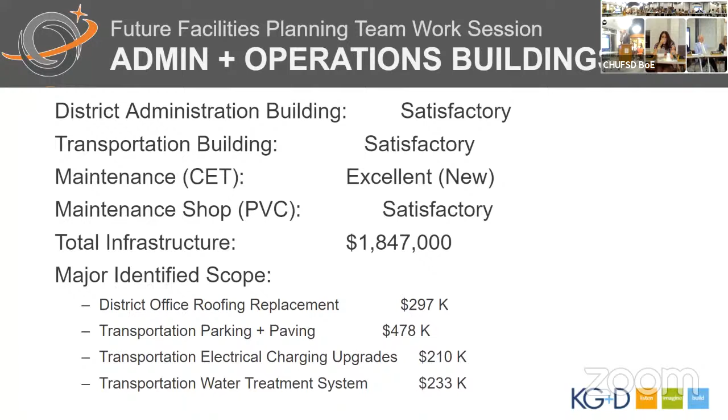So this is actually a very key slide - this is by priority. And what this is telling us is that the vast majority of the recommended work falls into that priority 3 category. Remember, priority 3 are items that are in good working order, but are at the end of their expected useful life.

This is indicative of very strong maintenance programs and a very sound capital plan. So we have very few items relative in this whole proposal of priority 1 items. That means that the buildings have been well cared for, your buildings are in good condition, and this is a prudent plan to avoid any emergency with your infrastructure. So that's a great slide.

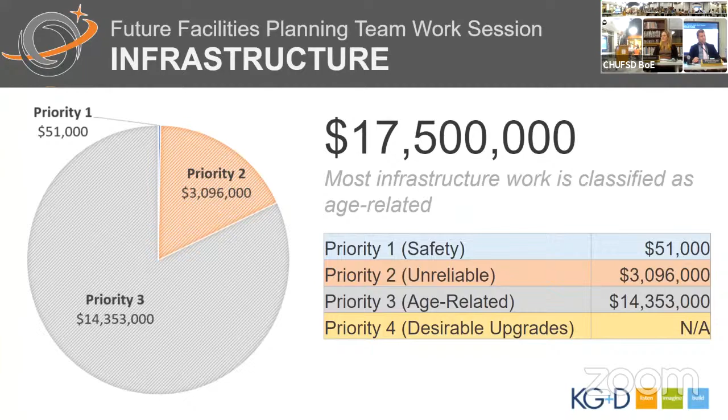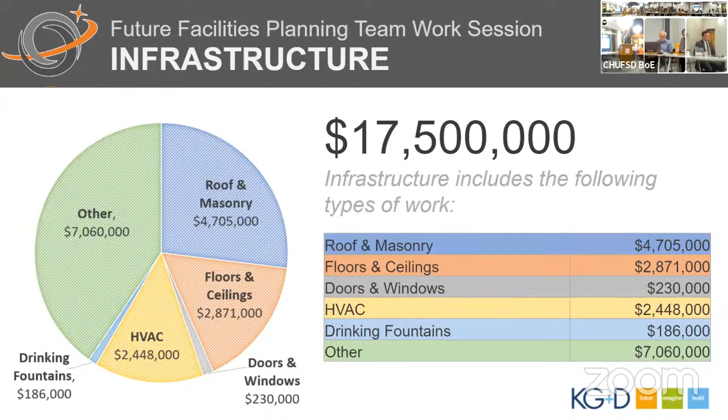And then this just captures the work by category. We talked repeatedly about roof and masonry, interior finishes. There is a little bit of doors and window work, a significant amount of HVAC improvements, drinking fountains and bottle filler stations throughout all the school buildings, and then a broad brush category of other, which captures about $7 million.

Other includes all those different systems that fall into the building condition survey form, and you can see there's quite a few of them at different locations, and most of them happen in all of the schools - things like fencing, exterior signage, casework, handrails, plumbing fixtures, locker repair, VCT, and then some things like fire service valves, etc. So there's quite a bit that falls into that other category.

Thank you, Walt. The future facilities team has been working diligently with KG+D, especially Walt and Sarah, to envision a project that would have the broadest impact on students, both now and into the future. The team has arrived at a proposed project that aspires to balance the infrastructure Walt was talking about with a needed look towards future student experiences. This team's dedication was so appreciated that we want to take a moment to acknowledge them. And I want to echo that, John.

Thank you to every single member of the team for the outstanding, dedicated, diligent work you've provided so far. We're not done yet, I'm actually just getting started in some ways, but I wanted to take this opportunity to recognize and thank every one of you for your contributions on behalf of all the students, the faculty, the staff, and really the entire community. Thank you for your leadership.

As we take a moment, I would ask that the team take a look at the scope of the potential effect here, which I think is really impressive to consider. Across all buildings, as well as Spencer Field, if you take a look at the concepts the team has wrestled with and come to consensus around, I think it's fair to say that if approved by the community, this has the potential to impact broad swaths of the experience for students across teaching and learning, the arts, athletics, as well as the safety and security our buildings have come to be known for and expect.

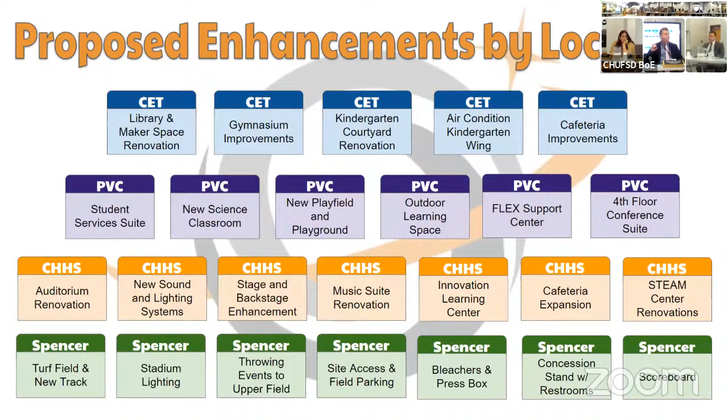We also want to make sure that as we did our work as a team leading up to tonight's presentation, as we looked at those four priority areas — teaching and learning, athletics, the arts, and infrastructure — we designed a project that felt balanced between each of those areas as well.

We designed this slide to represent that, perhaps in a different way for everyone graphically, beginning with the aspects of the project that relate to enhancing student athletes' experience, the experience of our athletics program, teaching and learning across our entire system, improving the experience of our students in the arts, and enhancing and supporting the infrastructure of our schools. I'll give everyone a moment to take a look at that — I find it impressive.

Thank you. As you heard a bit earlier this evening, CHHS will soon be celebrating 100 years, which is a reminder of how much history there is in this building, but also a real need for some updating. Considering that most of the building was originally designed to fit what education looked like in the 1920s, the proposed renovations we're going to talk about tonight focus on four key aspects of our school that will help set us up for what education needs to be now and in the future.

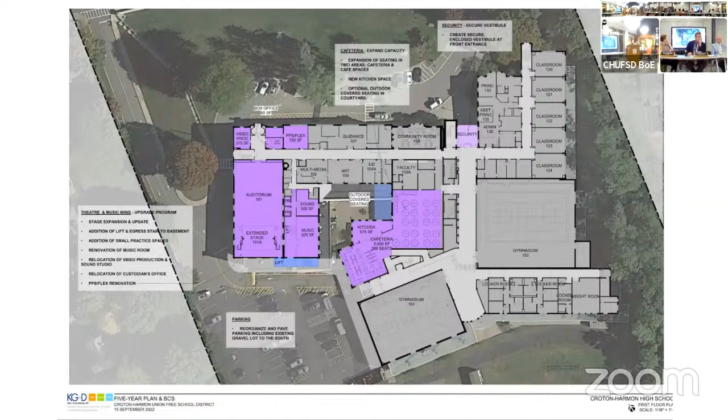So starting with the high school plan, what we've done is massaged things around a little bit. We've created a larger grouping of areas. You can see that the purple is actually the area that we are renovating, and anywhere in light blue will be the areas that would be an addition or something new for the building. So really what we've been trying to do is work as much as we can within the spaces that we have and just renovate within the interior.

You can see the auditorium itself is quite self-contained, but we're going to open it up to extend the stage, and try to make some more connection and also stair access for the basement and the upper levels that are connected to that.

And then for the cafeteria space, you can see that we're opening it up to have more of a kitchen space, which we don't have right now, with two distinct areas for eating, one more like a cafe and one cafeteria. And then also, as Molly had mentioned, the outdoor seating area.

You can see also up in the upper right, we are, of course, very concerned about security, and that has been built into the project too, to make sure that we have an enclosed vestibule as the entrance to the school.

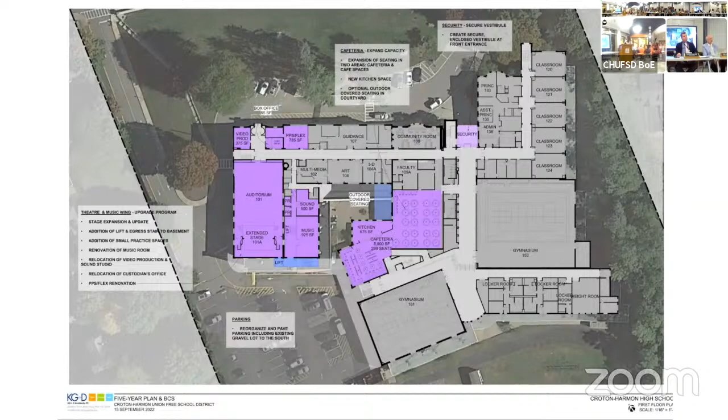So as they very eloquently expressed, this innovation learning center is really a great space. What we've done is identified together as a team one of these central spaces within the building that would be really well fit for this. Not only is it central, but it also is situated over where the older gym building was, so the structure is quite open and allows us to open that up.

Currently, there are about 6 classrooms in there, and like Dr. Laura said, they're small rooms and very close together, but being able to use this space and open it up will give us a great opportunity to do that.

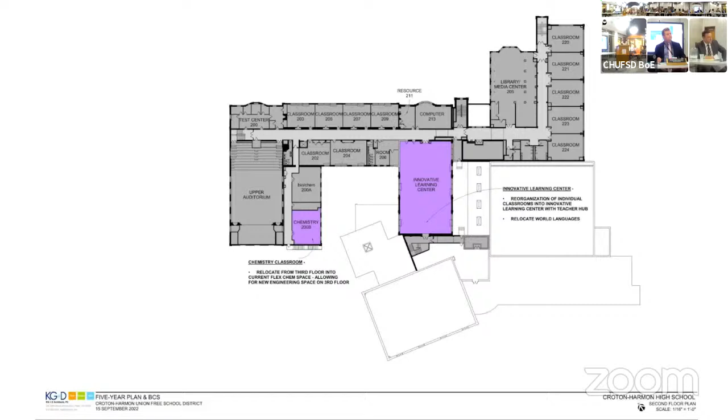And then on the top floor, you can see the highlighted areas are the rooms that we're planning to work with for the STEAM Center. Because we have an older building, we can't necessarily knock down walls here and there, but we're going to go in and do what we can to make those spaces much more dynamic and usable and helpful for the students.

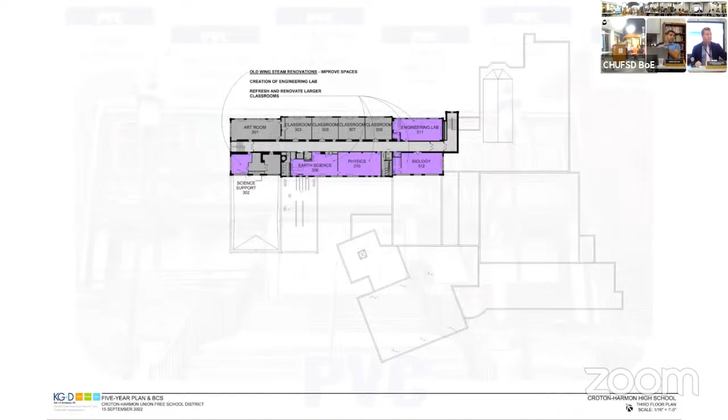Good evening. Thank you for having us. We're very excited to be part of this presentation, and more importantly, to be part of the future facilities planning team. First, I would love Sally to speak first this evening. Sally is one of the people who've been at PVC slightly longer than I have. I've seen lots of changes and been involved in those changes. She's also a resident and teaches two different languages. So I just said it has to be in English, but I know she prefers French.

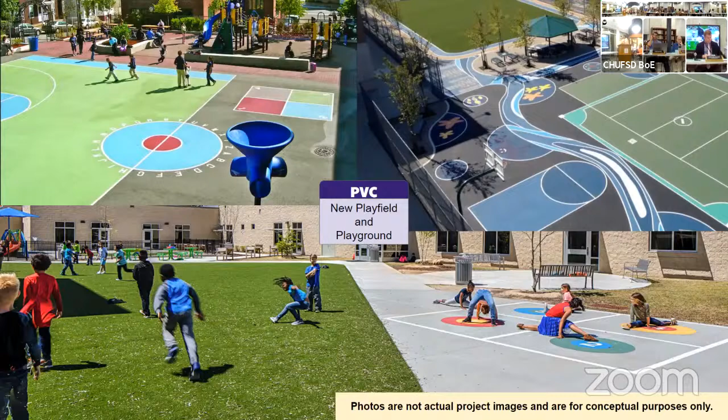The next one is the new student services suite and the Flex Support Center. I think this is really central. I'll tell you a story. We need to make this area for our students. As you know, we have 5th to 8th grade students, and we need to make it central and accessible and comfortable for our students.

So today, literally, I ran into a 5th grader who was waiting for one of our school psychologists outside their door. They were in a meeting, and the student looked very uncomfortable and didn't know what she was doing. This was on the third floor, and the door was locked. I said, 'Oh, can I help you?' She said, 'I'm waiting for Miss Elder.' So I said, 'Well, let's look around.' As I walked her past Miss Elder's office, I said, 'Here's Miss Bonilla's office, and here's Miss Beja's.' I literally walked her all the way through the building.

This child has not even been in the school 3 weeks, and think of how overwhelming that can be. To have a new student services suite is why we'd have new science rooms too, because we would put them downstairs in a central location. Michael's going to go into all of this. This would be very, very important. Also, students oftentimes go into guidance, and there will be students there and staff there. So we really need to focus on the students, going back to that social emotional part.

With that, the flex space—I'm on the 4th floor, and the flex room up there is somewhat outdated. I believe it was a locker room at one point. There's access to the outside. It's not as open and welcoming, I think, as it could be. When you see this kind of furniture and architecture, and add to that the wonderful staff and curriculum we can offer the students, I think that makes a difference.

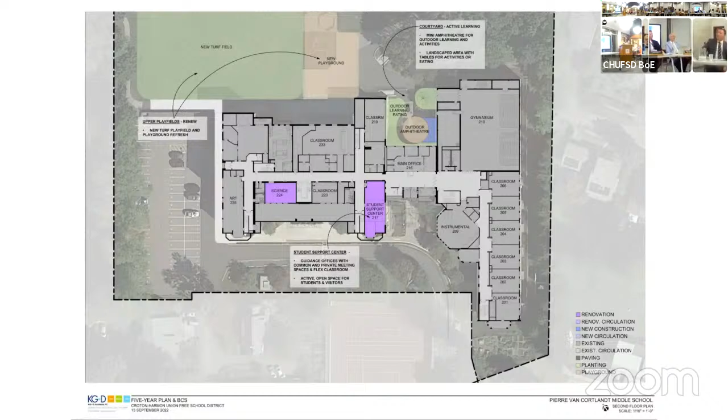Maybe a mini Coliseum? Many—we'll have to give it a good... Yeah, I don't want to use the Coliseum. Yeah, and then have people think of Russell Crowe.

Fair. I was hoping for Aristophanes, someone.

Going upstairs to the third floor, as mentioned before, the flex support used to be up on the fourth floor. Now we're moving down to the old principal's office, where we'll be able to create some private and common communal spaces.

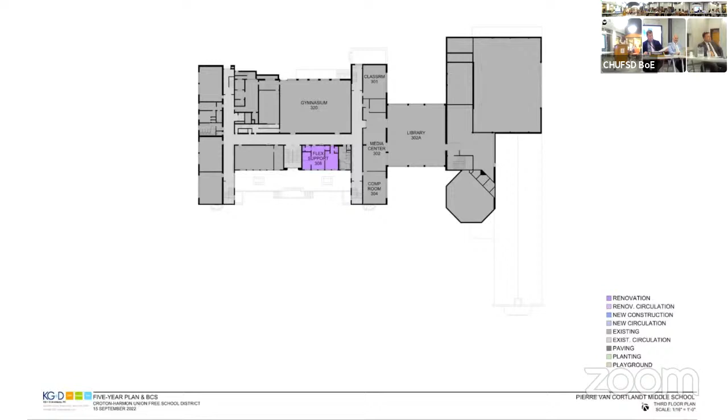Up on the fourth floor, the old flex support space will now become an office and conference suite, which will allow for more meeting space since there aren't sufficient spaces right now for teachers to meet. There's one conference room that fits maybe 8 people. This will allow for greater meetings and also utilize a space farther apart, so students don't have to go there for class or guidance, but it can be used for administrative purposes.

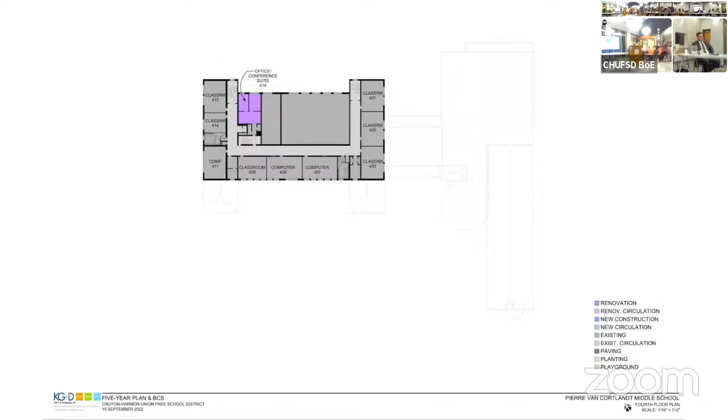Thank you, Sarah. And now to share the vision for CET, Principal Carrie Bianchi and Director of Technology and Innovation, Dr. Jared Blair.

Good evening, and thank you for the opportunity to share some of our thoughts and visions for CET at this time. When we were asked to create a wish list of proposed or desired changes and improvements to CET, I looked at this as a once-in-a-lifetime opportunity to improve the educational and social emotional experiences for our youngest learners.

So a few of the things we're going to look to do include, and we'll go into more detail about three of these as well: improvements and enhancements to our library space, improvements to our gymnasium, a really exciting opportunity to revitalize and repurpose our kindergarten courtyard area, as well as air conditioning in the kindergarten wing and improvements to our cafeteria space.

Similar to CHHS and PVC, sections of CET have been serving our students for many years. It has served us well, but was designed for the learning of over 60 years ago. Times have changed and the future remains unseen. The proposed projects will help ensure that we are meeting the needs of our current and future CET students, and will promote innovation and engagement for all students and faculty.

So the first area we're going to talk about in a little more detail is our kindergarten courtyard. Many people may not even be aware of the space we have in the courtyard that is centrally located down almost below our kindergarten, first, and second grade wings.

What we envision is a space to enhance our focus on the arts by providing a unique space for student performances, concerts, assemblies, drama experiences, as well as additional outdoor learning spaces for collaborative experiences, outdoor teaching, and outdoor center work. Many of our teachers learned, during the pandemic, how much being outdoors improved student engagement and provided unique opportunities. By repurposing and reimagining this space, we'll be able to serve all of our students in all of our grade levels who will benefit from this newly developed outdoor area.

We're picturing not quite a Coliseum, but more of an amphitheater type of space where students can go for any number of different things. I'll be honest, at this point that space is very underutilized, but it's such a unique and beautiful place to be. We're really looking forward to providing those opportunities for our students.

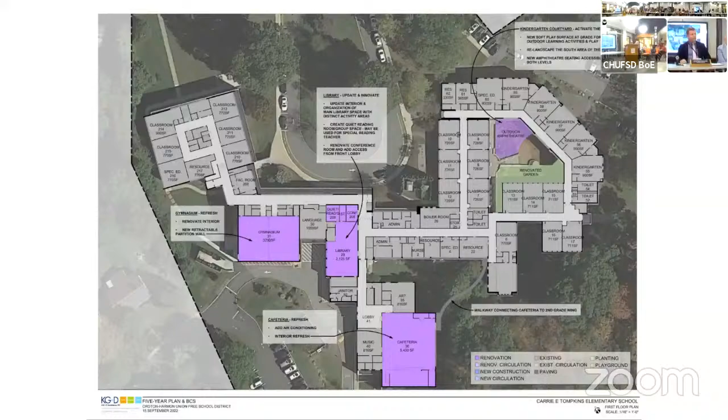Thank you, Sarah. And now to share the future facility planning team's vision for the future of the Spencer Field Complex, the man with the longest title in the school district. Director of Health, Wellness, Physical Education, and Athletics, right? TJ Goldman, and Mr. Joe Barillero.

Hi, everyone. Good evening. As Superintendent Walker just announced everybody, I'm DJ Goldman, the Director of Health, Wellness, Physical Education, and Interscholastic Athletics here with the Croton-Harmon Schools. It truly is my pleasure to be able to speak in front of all of you this evening with one of my helpful colleagues, Joe Barillero, and to talk about the vision for what Spencer Field can become. And I know that it has been quite a bit of time that the community has been considering a turf project at Spencer Field. And I would be remiss to not take some time to thank the group that met several years ago in the development of ideas about the turf project, and to really credit them for a lot of the vision and planning that has now hopefully come to fruition on a day like today.

Some of the items that will be included within the Spencer Field complex planning include the turf field and the surrounding track, as well as the opportunity to provide stadium lighting for Spencer Field.

With the transition of a natural grass surface to a turf surface, we will need to move the location of our track and field throwing events. So that's also part of the plan for the CET upper field.

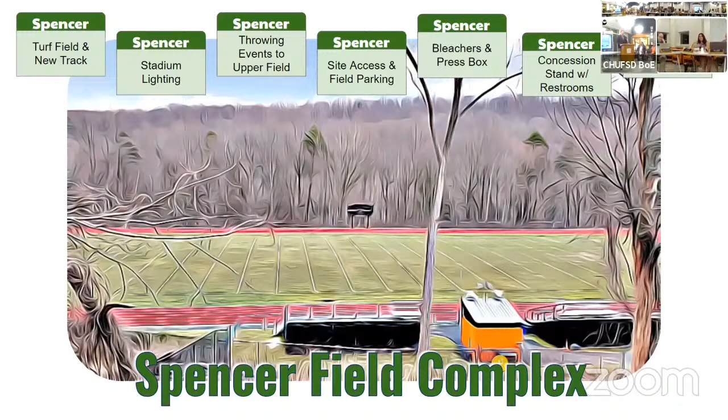Also, with the current location of the scoreboard and the new planning for the turf and track, we're looking at re-envisioning where the scoreboard would be located and how we can bring ourselves to the forefront of programs within all of Section 1 interscholastic athletics.

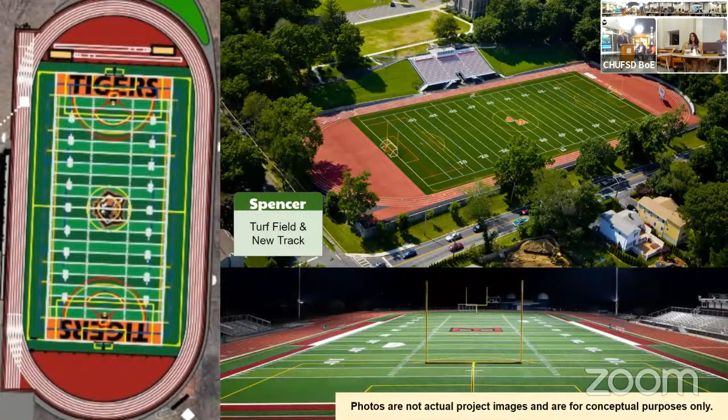As you can see on some of the slides, here are some potential renderings and ideas we have for our turf field and the surrounding track.

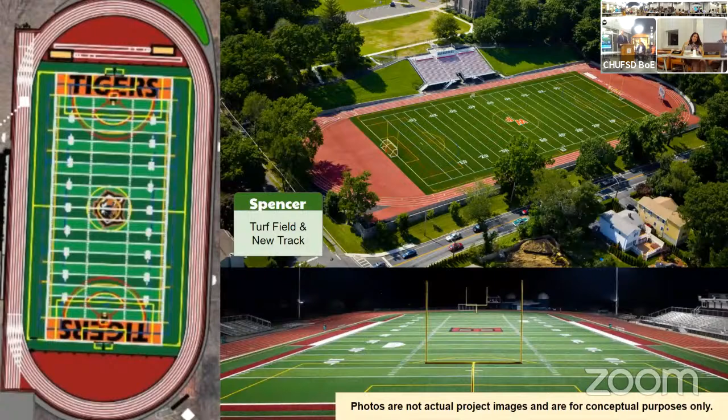For those not aware, within Section 1, about 90% of our most common opponents currently offer a playing surface that is artificial turf or an artificial playing surface. So this would really bring us to a competitive level with our most common opponents in Section 1.

For a long time our student athletes have been disadvantaged simply by things out of our control, like the weather. Even with the greatest efforts in communication and planning with my colleague Brad Kennedy and his team at the grounds department, there are certain things we just cannot do even with the best of efforts. By transitioning to a turf field, we would have the ability to continue practices and contests even when conditions are not at their best.

Another component of the plan is for our bleachers to be updated, providing additional disability access, because it's one of the most important things that we want every single member of our community to be able to attend all of our events and enjoy them. With upgraded bleachers, we'll make sure that possibility comes to fruition.

Along with that, we're also looking at an area specifically dedicated as a press box to allow for continued enhancements we learned through COVID, the ability to live stream, announce, and provide a more positive experience for all our student athletes. It also allows for continued scoreboard operation, announcing, and cover for coaches, so we can continue to provide an experience we currently would not be able to provide in inclement weather.

And now to share the architectural drawing of the Spencer Field Complex. Sarah, one more time. This is a quick one.

So as we talked about before, we're utilizing the upper field for the throwing events. And what that would require is also extending the field itself by about 30 feet, I believe, to make it regulation size for certain sports. So that would be part of that interaction there.

We're talking about also adding a concession building, which is number B right there, down by the field. It would be accessible from both the new parking lot and the field, much easier for people with accessibility issues, but also for coaches, ambulances, and everything we need for games.

Over at number C, we're talking about making that path more accessible, more secure for walking, adding lighting, and making it easier to get down to the field. And then obviously the main event is the field and the track itself. The bleachers and press box would be seated into the hill there, similar to where we are now, while also keeping that connection to the trail for public use.

Great, thank you again, Sarah.

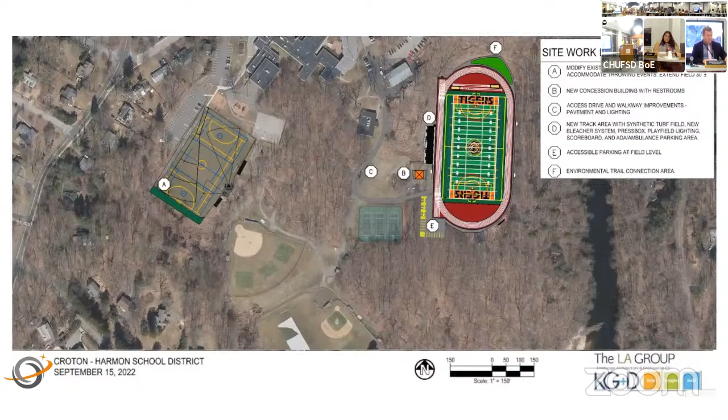One of the other topics, for a number of reasons, but first and foremost because most of the meetings took place in June, July, and August, that the future facilities planning team thought through was the concept of air conditioning in the spaces throughout the district. This is a particular priority for me. We'd love to say to the community, faculty, staff, and students that we can propose air conditioning all spaces across the entire district, but it became apparent quickly that isn't feasible at this point, partly because financially it would make the project beyond our scope of tax neutrality.

We'd probably add between $12 to $15 million overall to the project's financial scope. Beyond that, air conditioning some spaces would mean removing systems not yet at the end of their usable life. So from a lens of sustainability and efficiency, we didn't think that was a reasonable recommendation to make. What we are proposing, though, is air conditioning for a range of new spaces.

Across CET, PVA, and the high school. The thinking behind this is that because of the extent of proposed work in these spaces, it would allow for some of those systems to be overhauled and changed out, allowing those spaces to become air conditioned where they currently aren't.

The team also wanted to think through this proposal through the lens of health, wellness, and sustainability. You'll see a range of ways the future facilities planning team has come up with proposals within tonight's scope that we think are responsive to those imperatives: replacement of older mechanical systems with newer, higher efficiency solutions; focus on outdoor learning and outdoor experiences across the system; abatement of materials and replacement with new, healthy materials; improved ventilation systems; enhanced infrastructure to support future electrification of our bus fleet; as well as water bottle filling stations across our district.

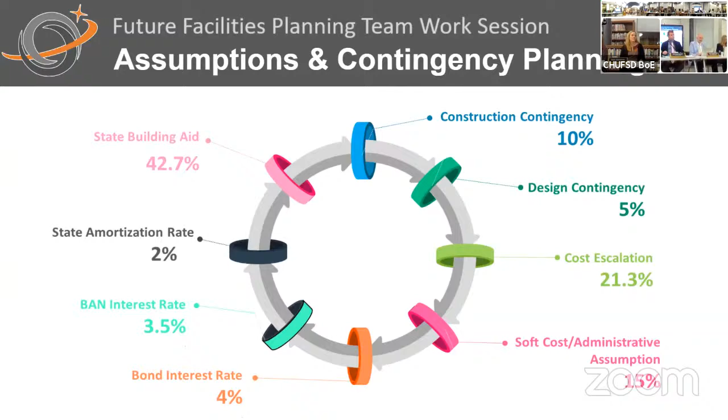Everyone with me on that?